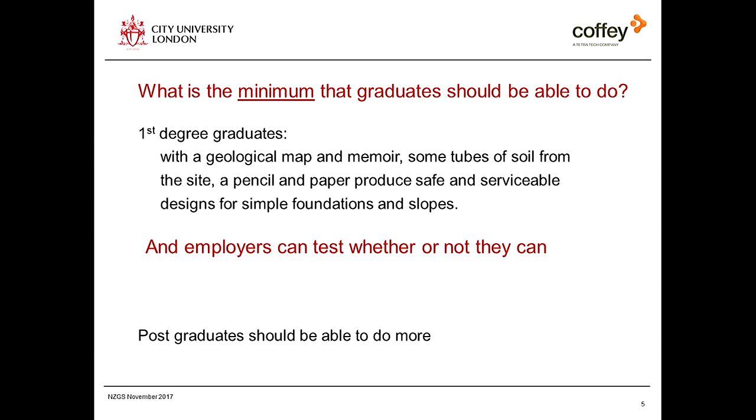Of course, postgraduates would be able to do much, much more than that. And you would hope graduates from a first degree course in civil engineering could do more than that. But if they can't do that, it seems to me there's no point in asking them to do anything else.

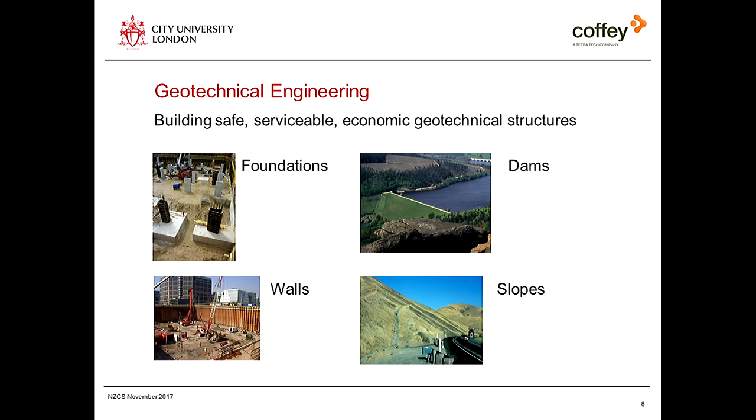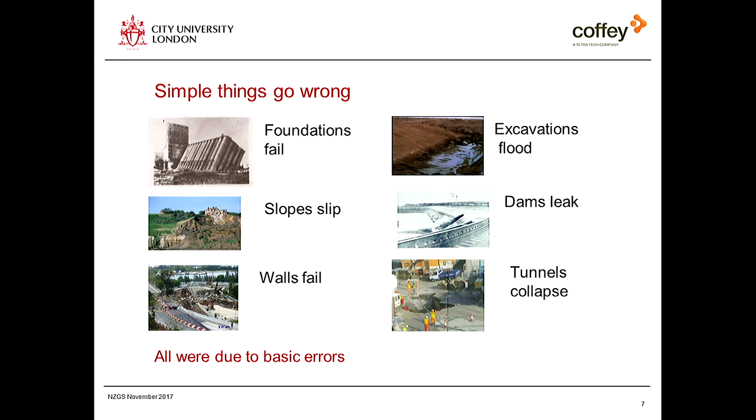Now, geotechnical engineering is about building safe, serviceable, economic geotechnical structures - foundations, dams, walls and slopes. And things go wrong. These are some of the classic failures in literature. You're probably familiar with some of these if you've studied the literature of things going wrong.

Now, I want to distinguish very clearly here between experience and expertise. You talk about an experienced engineer - what that means is they've been doing something for a long time, probably slightly incorrectly. Nothing's gone wrong and they've been lucky, and part of the reason is the margins of safety in geotechnical engineering are absolutely huge. You have to make a major cock-up before something goes wrong, and people make major cock-ups because they didn't get the fundamentals right. Now, expertise is about getting the fundamentals right, and that's what I'm interested in. Somebody with expertise will say, this is the first time I've done this, I'm doing it properly, it will be fine. So just remember the difference between experience and expertise.

And for you young ones, when the senior engineers quiz you over your designs, look them in the eye, because you're probably better engineers than they are.

Now, geotechnical engineering is not a standalone subject, despite what your university lecturers thought. They would ring-fence their subject - structural lecturers would ring-fence structures. There's very little intercommunication, but there's a lot of common ground between these disciplines, and I'll show this later on. Really, it is all physics with a little bit of chemistry. Everything in the way of engineering analysis boils down to physics.

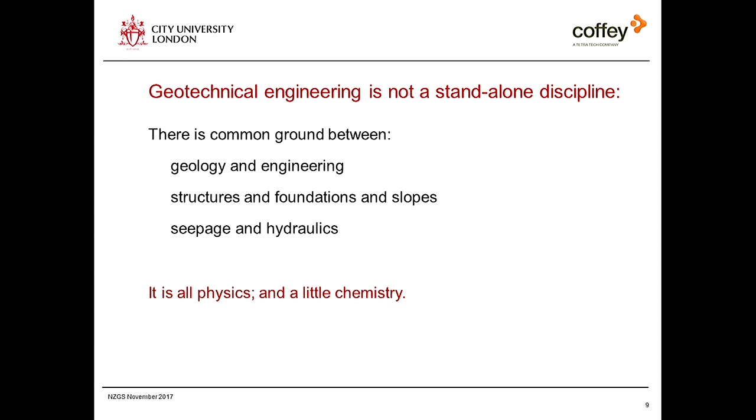Geology and geotechnical engineering are of course obviously related, and you might think about the overlap between those disciplines. Geology describes the past - it's a logos, a cataloguing subject. It describes the geo, it catalogues the geo, it says how did this material become like this. Engineering predicts the future - it says how much will this foundation settle if we load it. Now think about that, because the whole of geological teaching is to do with the study of the past and interpreting the past, and geologists have a certain mindset as a result of their education. Whereas engineers are all to do with calculations and forward looks and what happens if we do this and that, and that gives them a certain mindset.

And the trick is to see the overlap so the two work together.

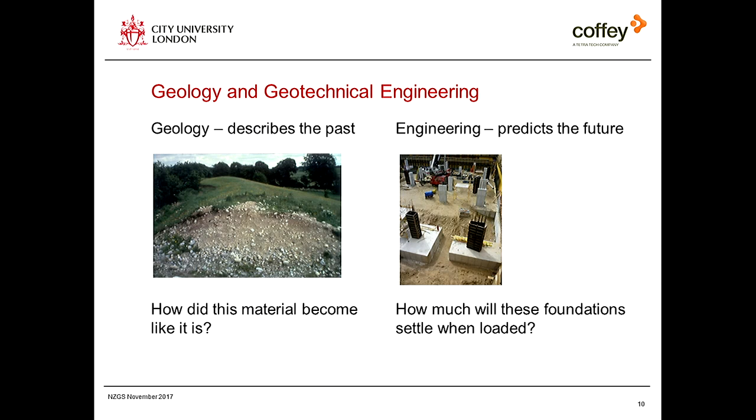There's another thing to think about - is the basis of geotechnical engineering empirical or is it theoretical? There are people who say that soil in the ground is so variable we cannot have a simple universal theory for soil mechanics, therefore we must test the hell out of everything and use empirical correlations. And there are others who say soil in the ground is really only a collection of mineral grains, rough or smooth, rounded or angular, arranged in a certain way - it is perfectly possible to have a simple universal theory that describes the behaviour of mineral grains. And it's not a question so much of what do you think about that, but what did your teachers think about that, because that's what you think about. I started my career at Imperial College as part of the first lot, and later on I was lucky enough to go to Cambridge and became part of the second lot.

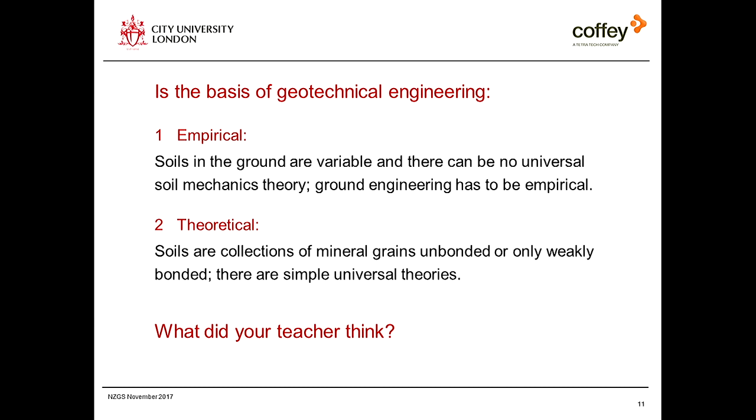I bridged the gap. Now, process.

How are skills manufactured? It's another way of talking about education. Think of education as a manufacturing process - so raw materials go into the factory, they are school leavers, they have basic maths, you can write an essay and you hope they can behave properly. And they go through this thing called a university that's a factory, it's turning raw material into a product, and the product is graduates in the construction industry. All that stuff about advancing knowledge and all that stuff - that's what happens, that's the realpolitik of education.

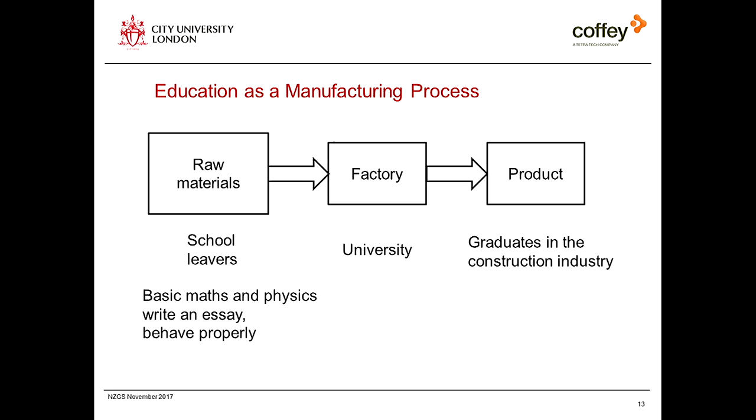Oh my goodness, that's fun, isn't it? I wonder what that was.

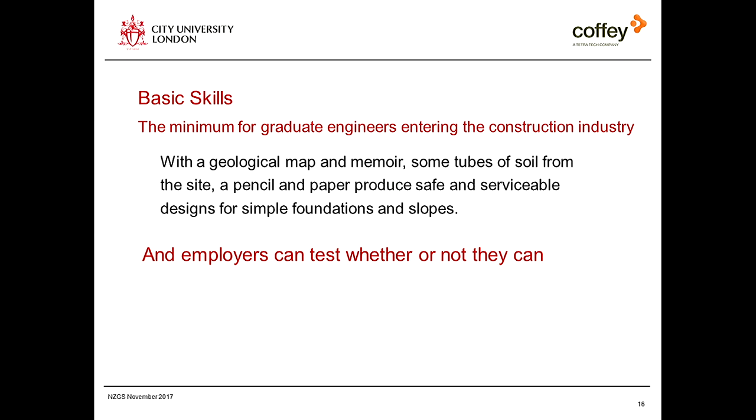They should be able to design a safe slope, and they should be able to design a serviceable foundation. In order to do that, they need to be able to determine appropriate parameters and do calculations with a pencil and a piece of paper.

No computers, because I come from a generation before electronics. I didn't even have a calculator. All I had were log tables and a slide rule. You know what a slide rule is, but the majority of those probably don't. But we know about that, don't we? Yeah, right. And I want people to be able to do these things, and engineers should do these things before they touch the first button.

I'm not going to talk about retaining walls here. Retaining walls are difficult, and I don't think it's appropriate to ask graduates, just people doing an undergraduate course, to really get to grips with the niceties of retaining wall design. You can get them to calculate earth pressures and all the rest of it, but there's no human known to man who can really get to the bottom of the stresses and displacements on a retaining wall. So it's not right to ask students to do it as well.

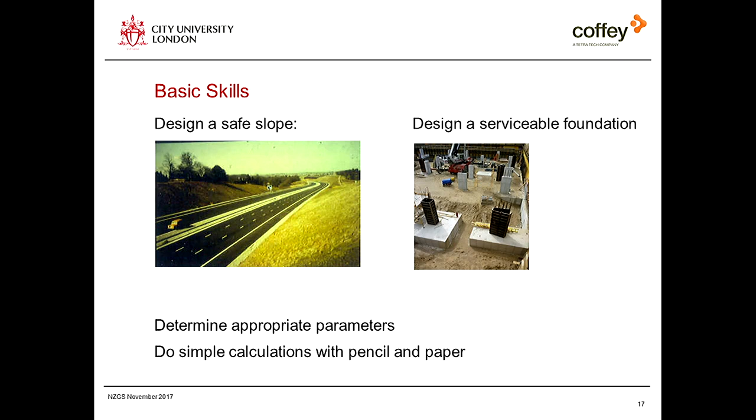There's a lot of common ground across an undergraduate course. Geotechnical analyses are very closely related to the basic analyses in structures and hydraulics. It is entirely wrong to ring-fence these subjects. There's so much overlap across them. They should really all be taught as common civil engineering.

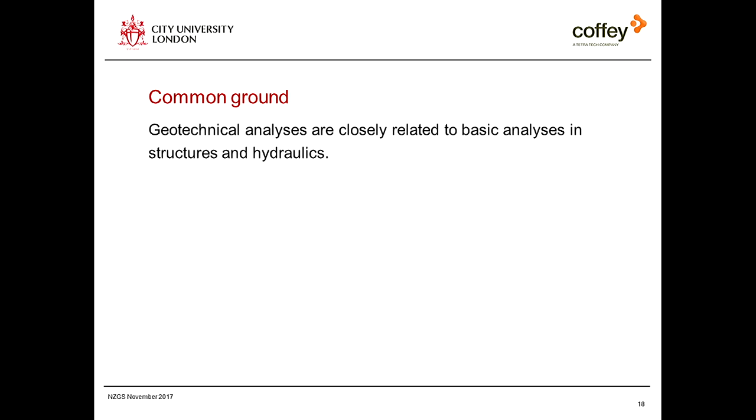For example, the calculation for the ultimate limit state of a beam is very, very similar, and the principle is identical, to the calculation for the ultimate limit state of a foundation. There's some work done on the left, and there's some work dissipated on the right. It's the same in both cases.

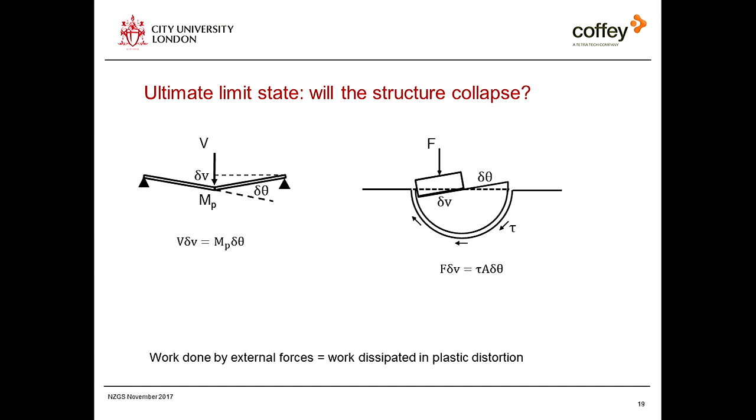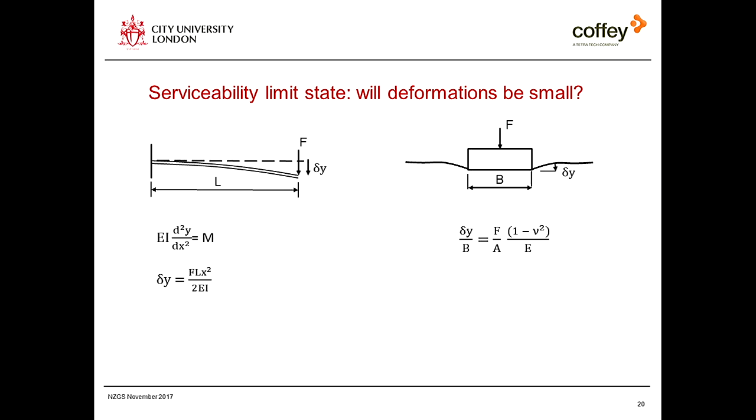The analyses for the deformation of a simple cantilever of a beam are very similar to the calculations for the settlement on a foundation on elastic soil. There's a displacement, there's E's coming in, there's A's coming in, and if you look across those equations you can see the principles are just the same. And the principles for thinking about open channel flow, Bernoulli, there's the Bernoulli equation, are very similar

to the analyses for flow of water through soils. If you look across, they're almost the same, except in seepage, the V squared term is neglected because the velocities are so small, and there's a head loss, P, and in the Bernoulli equation, energy is conserved. But they're very, very similar.

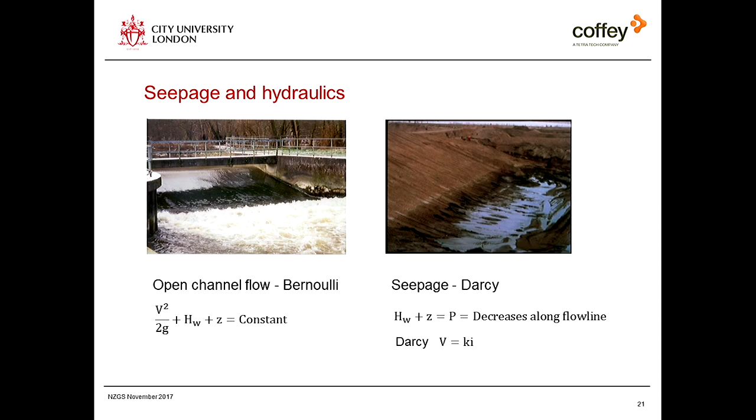And why should students come away from their course thinking that these are completely different subjects, completely different topics, with completely different analyses? Why shouldn't they be given the opportunity of seeing the overlap and developing their thoughts in that way? But the soils are different, and they're different in this way.

The soil behaviour depends on pore pressure, Terzaghi, so rates of loading and drainage matter. We'll see this in a minute. Strength and stiffness of soil vary with current stress and strain, and so change with loading. We know about friction. You may also know about the decay of stiffness with strain. These two little things are those that make soils a bit more interesting than steel. I mean, steel is just not interesting. Now, concrete is moderately interesting, but that's only cemented soil.

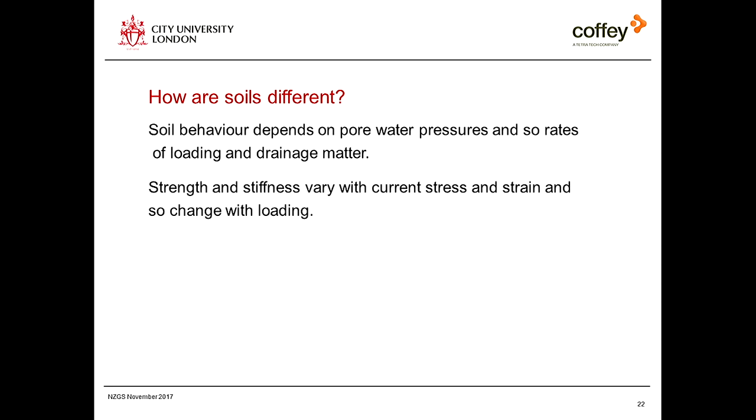And again, luckily, total and effective shear stresses are equal. When an engineer writes down an equation, it must contain all effective stresses, or all total stresses, or if there are total and effective stresses, they must be correctly related by the pore pressure. Just make sure that that happens when you write down an equation. I've seen many engineers mixing up total and effective stresses, and when challenged, they say, oh, it doesn't really matter, does it, John? I say, yes, it does. You must get that one right.

Now, when you open your standard textbook, Craig, anyone? You find page after page of analysis that justifies the principle of effective stress. Well, most of those analyses are actually wrong, and you shouldn't be worrying about them anyhow. This is one of the things that you've got to take on trust, and it's better not to question why. That works, and that's all you need to know. It works well.

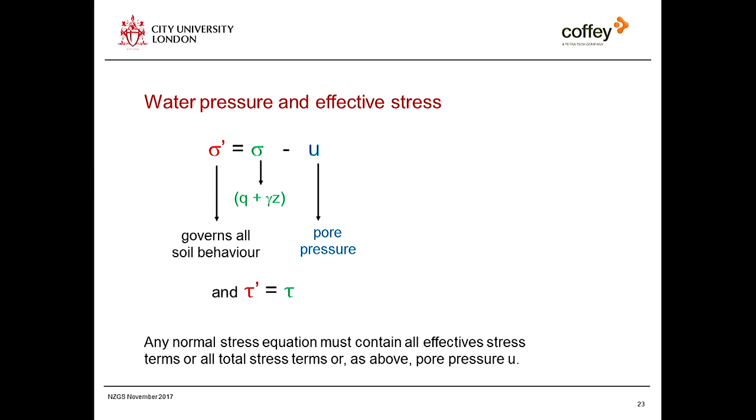Now, when soil is loaded, water has to squeeze out or not squeeze out. So we have two cases, and the question is, when soil is loaded, does the water move while the loading is being applied or not? So we have two limiting cases.

Here, the loading is drained because the pore pressure remains constant with time. As the total stress increases, the effective stress increases as well. If the pore pressure remains constant, you know it, so you can calculate effective stresses, and that is an effective stress analysis, sometimes called drained, sometimes called slow, which is a misnomer.

Welcome, you're not really terribly late, it's all right. The rest of you will be brought up to speed later on. I know the room is hard to find, but there you are. We're only up as far as consolidation, so it's okay.

Over here, the loading is applied so quickly that during the loading, the water has no time to move. In that case, the water pressures change, and the volume doesn't. That's called undrained loading, and because we don't know what the pore pressures are, the analysis has to be done with total stresses, and that is called a total stress analysis. They must not be mixed.

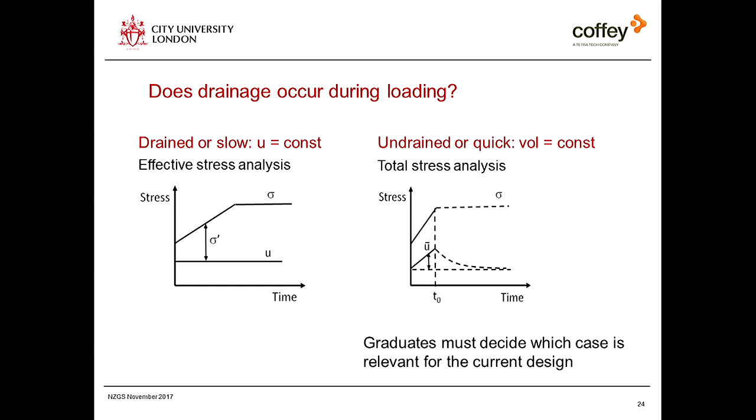Rates of loading and drainage vary enormously. Down the left-hand side there are rates of loading. An earthquake is of the order of 10 seconds, okay, we can argue whether it's 1 or 100, down to natural erosion, which over 30 years is 10 to the 9 seconds. So not many of you are more than 10 to the 9 seconds old. Some of us are well over 10 to the 9 seconds. But there's a huge difference there in the time it takes to apply loads.

Similarly, this is permeability. Now, if I said K is 10 to the minus something, that doesn't mean anything. So what I've done here is to show permeability in terms of how long it takes for water to flow 1 metre under a unit hydraulic gradient.

In gravel it's around 100 seconds, in clay it's around 10 to the 8 seconds. Again, this huge variation. For typical construction, 10 days to 3 years - you can dig a reasonable hole in 10 days, build a large building in 3 years. That's about it.

Sand and gravel, which are coarse, can be considered to be drained because the permeability is so large the water flows during the loading, and we can do effective stress analyses. For silts and clays, they are fine-grained soils, we have to consider them to be undrained, so we have to do a total stress analysis followed by consolidation.

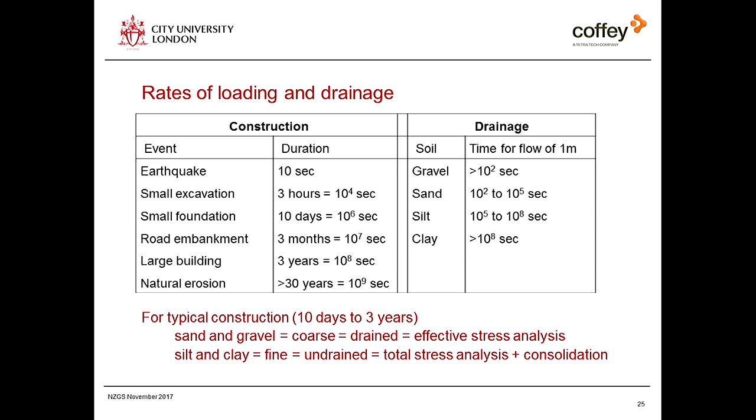Just notice we're talking about coarse-grained soils and fine-grained soils, drained loading and undrained loading - no mention here of cohesive soils and frictional soils. Soils are not either cohesive or frictional. Soils are either drained or undrained.

So engineering soils are simply a collection of mineral grains. They behave in exactly the same way, and what's controlling the behaviour is what's happening to the pore pressure. That's what the difference is in there - it's the pore pressures in these materials that are different. We'll explain why later on.

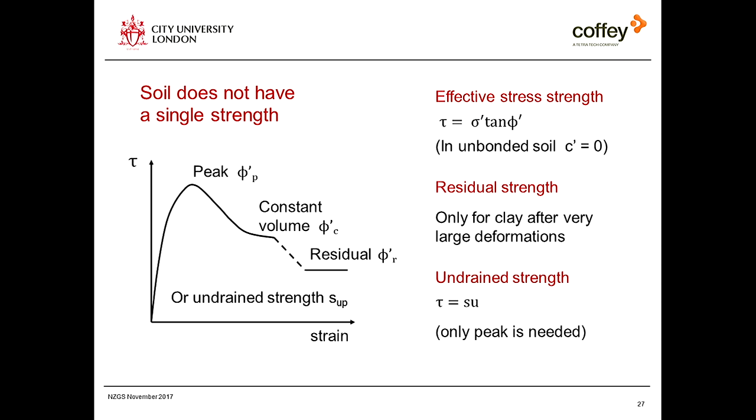So soil has at least 4 strengths. You can't talk about the strength of soil or the strength of a soil - it's got 4 strengths. And the engineer needs to decide which of those to measure and to use in an analysis. Graduate students should be able to do that because they know the fundamental principles of what's happening. Or we hope they do.

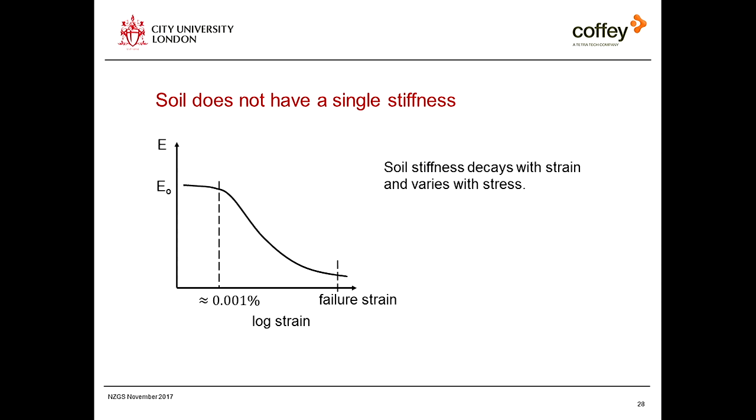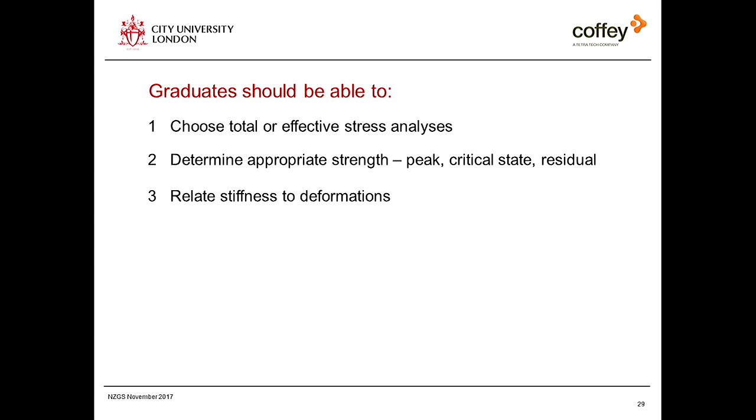Soil does not have a single stiffness, unlike steel, and we know that there is a rapid decay of stiffness with strain - from very small strains, very large stiffnesses, down to very small stiffnesses near failure. That's a very, very significant reduction in stiffness, and it matters. It's really such an important feature of soil mechanics that needs to be explained and taught, introduced at undergraduate level. So graduates should be able to choose a total or effective stress analysis, determine the appropriate strength, relate stiffness to deformations. They should be able to model the ground.

What are soils? They're simply mineral grains with water. That's what soils are. Engineering soils are that - gardener soils are a little bit different, but engineering soils are that. Rocks are like that, but they are strongly bonded and jointed.

One of the tests you must do with a piece of soil is determine whether it is bonded, whether it is cemented or not. To do that, you put your soil sample in a glass of water and come back in 24 hours, and almost certainly if it's a soil, it's just formed a cone, because soils are not bonded. If it's slightly bonded, it will be very weak, and you can examine that by poking pencils into it.

Rocks are strongly bonded and contain joints. That is the distinction between engineering soil and engineering rock: are the grains bonded or not, are there well-defined discontinuities and joints. Soils are grains that are not bonded, rocks are cemented soils that are jointed.

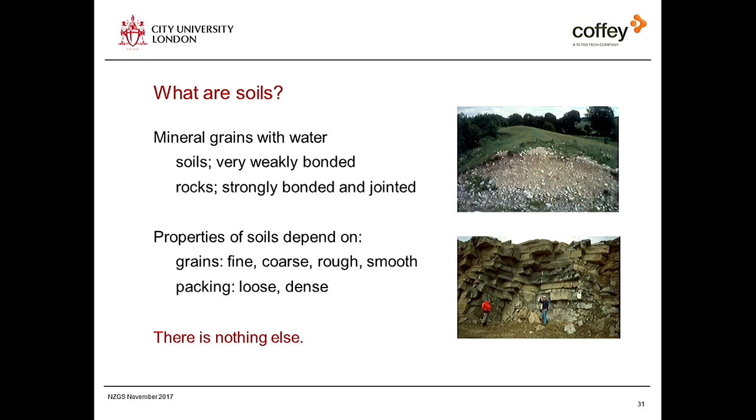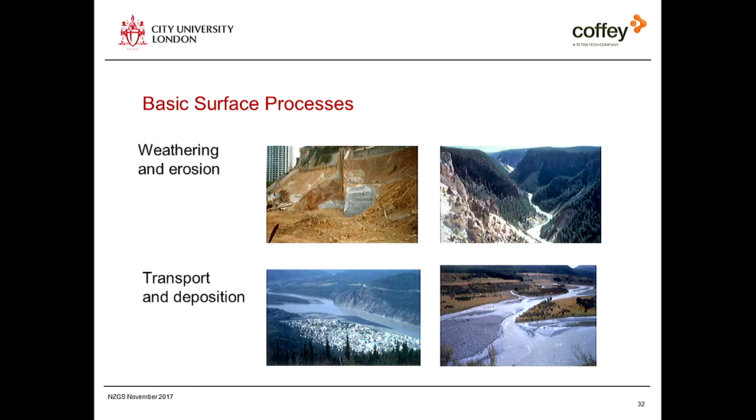There are a number of basic surface processes. There's weathering of granites in Hong Kong, erosion of a river valley in the Himalayas, transportation of materials in Canada, and deposition of the gravels somewhere I'm not sure.

Those are the fundamental mechanisms which create engineering soils. Climate determines the product of weathering. So when rocks weather into soils, what is produced depends not so much on the parent rock, but on the climate. In hot, wet climates, there's enough heat and wetness to change rocks chemically, and you finish up with quartz sands, which are inert, and clays of some kind.

In hot, dry environments, or in cold environments, there's not enough to get any chemistry going, but the changing temperatures every day simply expand and contract the rock. If you took a piece of rock and put it in the oven every morning and in the fridge every night for 10,000 years, you would finish up with sand. And that's how sands are made. They have the same characteristics as a parent rock, but the materials that are a product of chemical weathering are now quartz sands, which are essentially inert, and clays. Now that's, for you geology people, an extremely simple and simplistic view of the world, but it's enough for undergraduates to get a grip of what's happening.

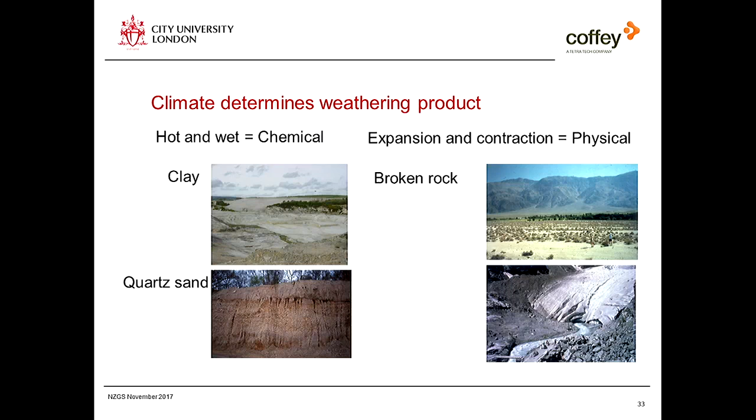When you're looking at a site and the soils, I want you to think about where it all came from. Where did the grains come from? How did they get to where they are? What has happened to them since they were deposited? And remember, because of plate tectonics and all this moving around stuff, everywhere has been somewhere else.

Now, England is quite interesting in this respect because it's on a bit of crustal plate that just moves steadily northwards throughout geological time without doing anything dramatic. There's been a few volcanic episodes, but it started off south of the equator, roughly where the southern African deserts are now. So our very early rocks, the Devonian, are sands. Then it moved up to the Congo, hot, steamy, and we go through the Carboniferous, our coal measures, and then we go to the Sahara, the Triassic, and then we go on through where the Mediterranean is now, the chalks.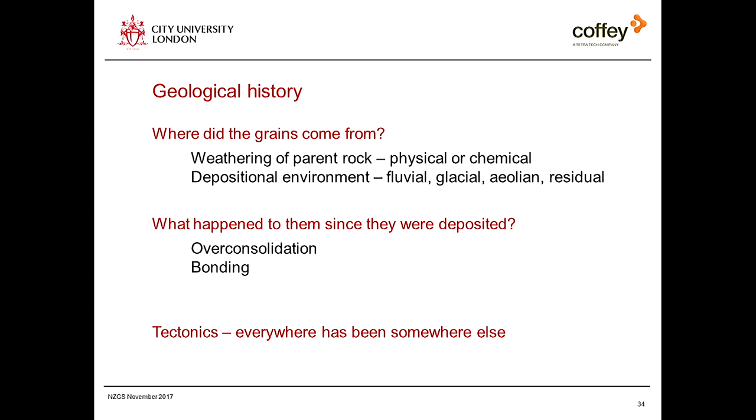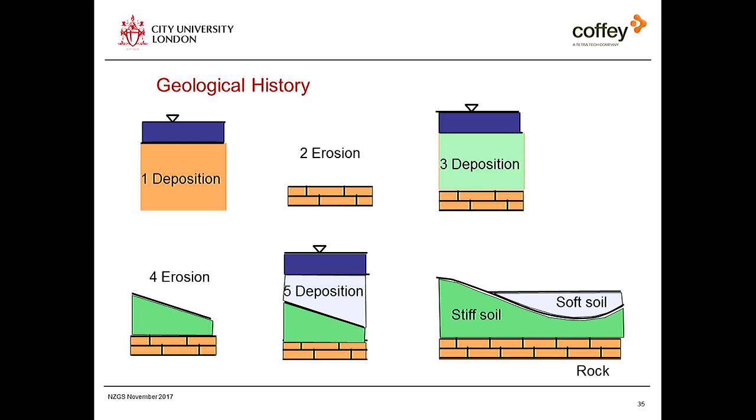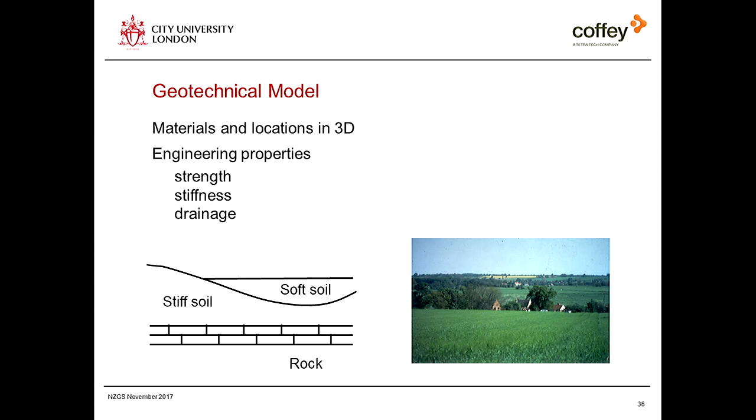This is a very simple geological history. You get some deposition, some erosion, some more deposition, some more erosion, some more deposition, and you finish up with a profile like that one. And that's fine. Without that pre-existing knowledge, all you see really is some rock, some stiff soil, some soft soil, and that doesn't give you the picture that you need. There's a photograph of a land surface for which the geology underneath is like that, and that's a great help in interpreting the geological maps and the borehole samples.

Engineers, graduate engineers, need to be able to evaluate design parameters - what friction angles should we take, and stuff like that. They should be able to, in order to start that process, give an objective description of soil. They've got to describe the grading, the shape, and the roughness of the particles. It helps if they can describe the mineralogy, and it helps if they can describe the plasticity, the Atterberg limits. And they should describe the state, loose or dense.

On Atterberg limits, it's interesting. You've got a liquid limit and a plastic limit. The liquid limit is the water content where it's all wet and slippery, and the plastic limit is the water content when it's all brittle and crumbly. You give an engineer a lump of soil and say, well, what's the plasticity of that, and they fiddle about with it, and say high plasticity that is, John, and low plasticity that's John. You can't do it like that, because what they're looking at is a lump of soil at a water content which may be anywhere between the liquid limit and the plastic limit. All they're looking at is the liquidity index.

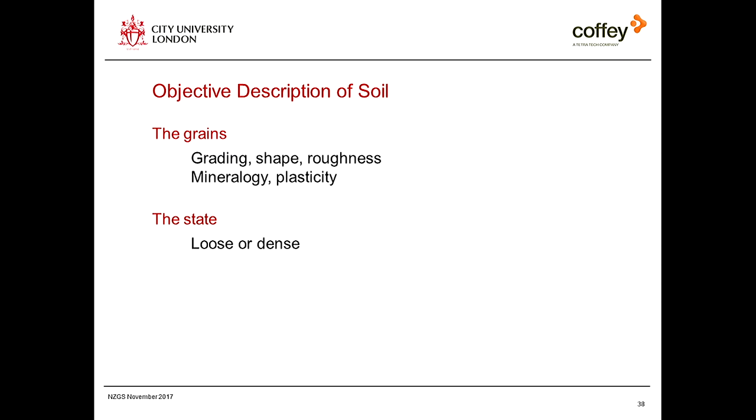You should be able to draw a grading curve by eye, just by looking at the soil. You can discover what the largest grain is quite easily. You can separate out into grains you can see from those you can't see, and that's roughly 0.06 of a millimetre. So you've got that point and that point, and just draw a line through it. The grading curve isn't going to be much different from that. But do it. Do it.

What is the grading of your soil? If you want to be clever, put it into a cylinder full of water, shake it all up, put it down, and the coarser grains will sediment first, then etc. You can't see it on that slide because the lights are up, but the soils here go from gravels, coarse gravels, medium gravels, coarse sand, fine sand, medium sand, silts. Anything left suspended after 24 hours or so is essentially clay, and anything left floating on top of the water is organic material.

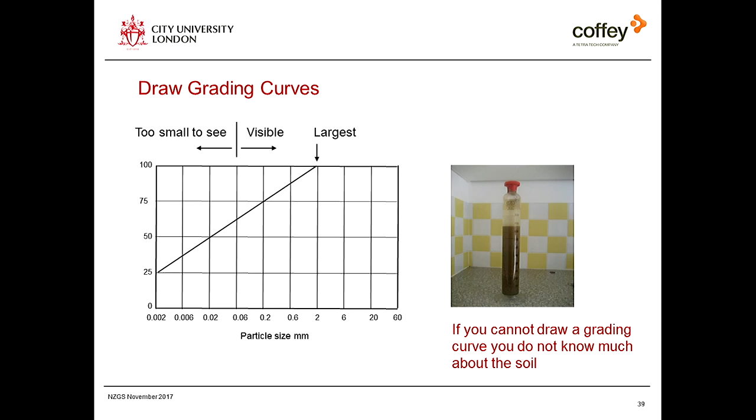Engineers, ground engineers, should have one of those and a glass of water on their desk. Not for drinking, but for sticking samples in. And you just do not see it, do you?

You should describe the grains - the ones you can see will be either smooth and rounded, or rough and angular. All this sub-rounded and all the rest of it, don't bother. It's either smooth and rounded because it's been worked in water, or rough and angular because it hasn't. For simple purposes, that's all you need to do. They don't teach you that at university, do they?

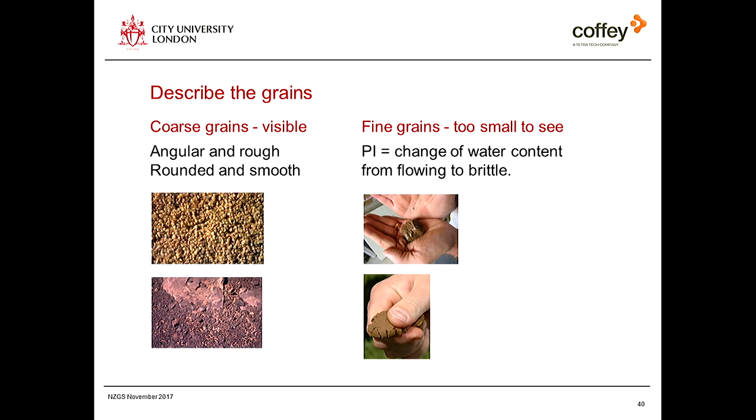Some parameters depend only on the grains. They are material parameters. The constant volume or critical friction angle is one of them. For soils which are fine-grained, you can't see the grains. If they're lower PI, we know about that, the friction angle will be in the high 20s. If it's high PI, we know what that means, it will be in the high teens, and anywhere between, it's roughly linear. London clay's in here somewhere, and the friction angle is 24 degrees.

You can do it, why not? You probably won't get a much better answer by chucking money at triaxial tests. For coarse grained soils, if it's smooth and rounded, it's 30 degrees and so on. It's just simple.

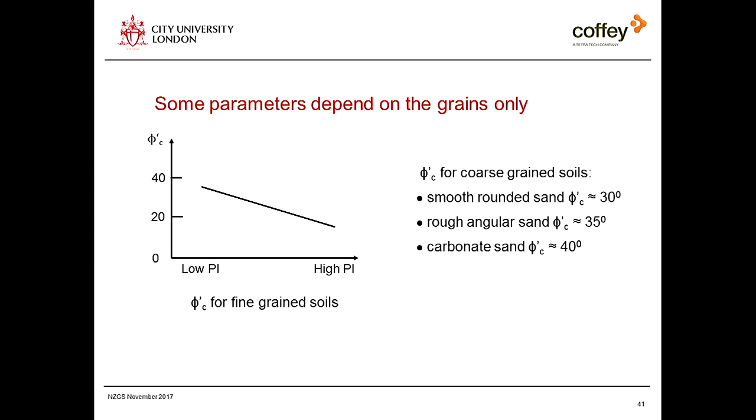Students graduating should be able to do these things. They should be able to estimate the current state between dense and loose.

When a fine-grained soil is at its minimum water content, it's at its plastic limit and it's crumbly. When it's at its maximum water content and still soil, it's soft and floppy. Those are liquid limits, and in between is the liquidity index. For coarse grained soil, the equivalent ones are the maximum and minimum density, and in between those are the relative density. Just notice the numbers go the other way. Ground engineering is perverse, isn't it?

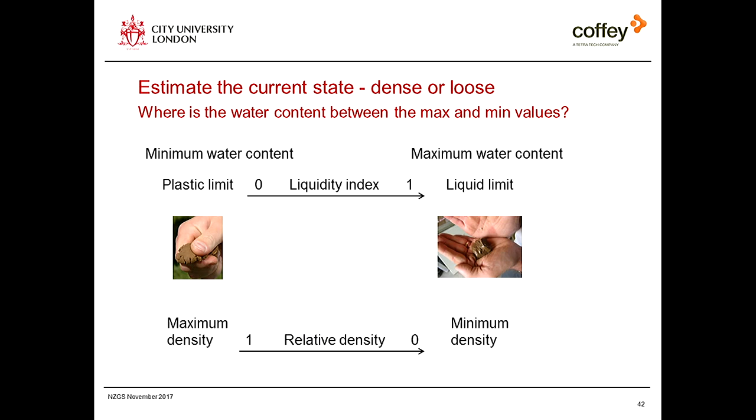That goes from 0 to 1, and that goes from 1 to 0. But a graduate engineer should be able to, from a sample of soil, make reasonable estimates of what its liquidity index is, where it is in those ranges. And there are simple parameters that depend on where it is.

The undrained strength of soil at its plastic limit is about 200 kilopascals. The undrained strength of soil at its liquid limit is around 2 kilopascals. There's a linear relationship between the Atterberg limits and the log of strength. So knowing the liquidity index, you can make reasonable estimates of undrained strength. And graduates should be able to do that.

There are simple relationships between angles of friction and relative density. And again, graduates should just be able to do these simple things.

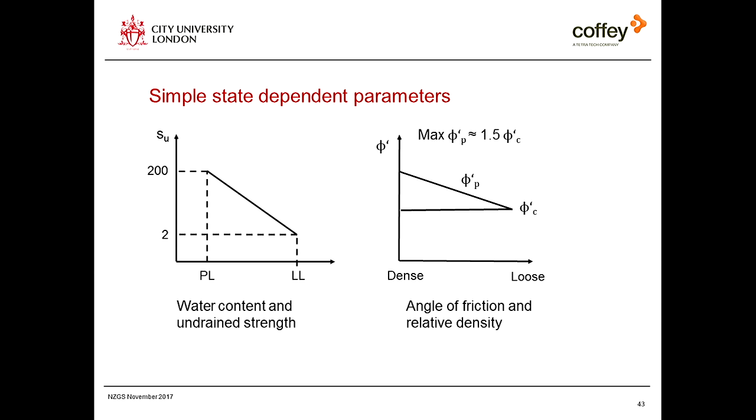You won't get significantly better answers by throwing money at laboratory testing. You might get slightly better answers, a degree or so here and there, but they won't be substantially different. So graduates should be able to describe a geological history, create a three-dimensional geotechnical model, and estimate design parameters from soil descriptions. They don't have to be able to do a triaxial test. In fact, there are very few of us who can do a reliable triaxial test.

Right, towards the end. They should be able to design simple slopes and foundations. Now, the basis of geotechnical design, any geotechnical design, is this.

You have to consider loading and drainage. If you believe the soil to be drained during your construction, you know what the pore pressures are, and you can do effective stress analyses. If you don't, it's total stress analyses. There are two distinctly different branches of calculation. One is to calculate an ultimate limit state, collapse, failure, and that is a plastic calculation. And there is another calculation which is to do with deformations at working load, and for simple geotechnical design, that is an elastic calculation. And then there are criteria for acceptance.

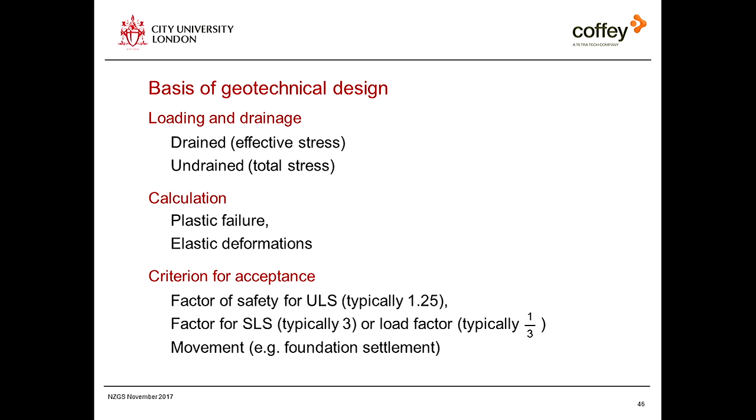And the answer is this. For the slope, we don't mind how much it moves, provided it doesn't fail. So the factor of safety is just that. It is a factor to ensure safety. For the foundation, though, we don't want it to move very much. And if it doesn't move very much, it won't move a lot. And we know, by chance, that if you calculate the ultimate load and divide by 3, you will be in a range of action where the movements are small. And that's the reason for that. So the factor there is nothing to do with safety, and we should stop calling it a factor of safety. It's a load factor, and it should be 1/3.

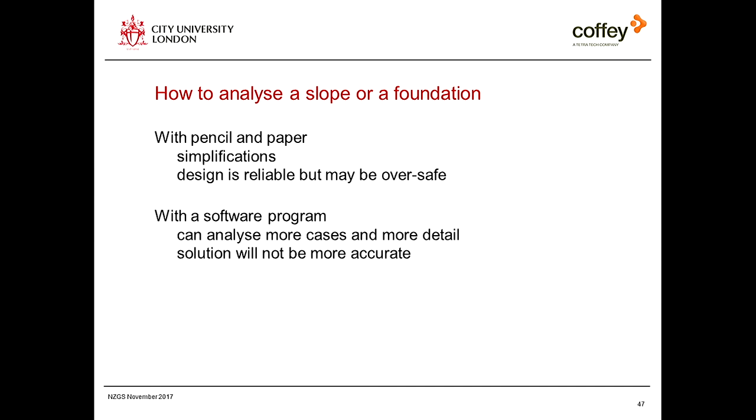All you need to know is that, critically, most slopes fail with slipping fairly shallow. In that case, it's an infinite slope case. If the slope is dry or totally submerged, the critical angle is the angle of friction. If there is steady state seepage, the critical angle is half the friction angle. And if you're really excited, you can go into the textbooks and find out why.

And the question now is, what strength should you put in here? Is it the peak strength, or the constant volume strength, or the residual strength? If you know there are old landslides there and old surfaces in clay, it's got to be the residual strength.

Otherwise, you can choose. Conventional practice puts in the peak strength with a factor of about 1.25. But a much more sensible way is to take the critical state strength, the constant volume strength, with the worst credible pore pressure and a factor of 1, just over 1, because it can't get worse than that.

By definition, you've chosen the worst credible pore pressure, so it can't get worse, and the critical friction angle is the lowest it can get, except if you get a residual. So my advice to engineers and students, graduates, is to make sure your slope stands up with the critical friction angle and the worst credible pore pressures, and the factor is a little bit more than 1.

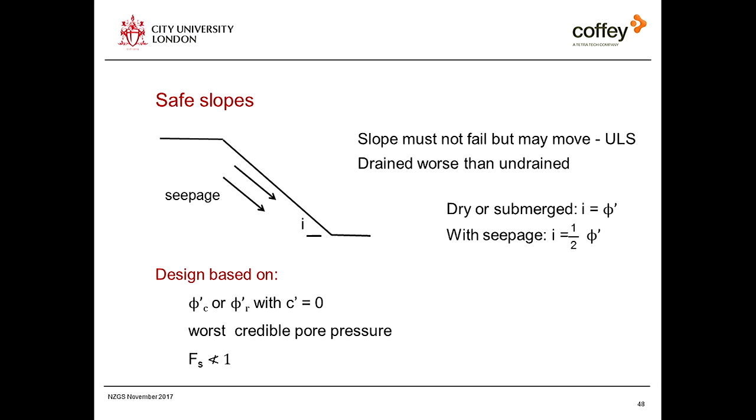So all you need to know is I equals phi, or I equals a half phi, and they are the constant volume, critical friction angles, which we've seen earlier on, are closely related to the grains. Sand, 30 degrees, and all the rest of it.

Easy peasy. People should be able to construct a reasonable flow net in which they can determine the pore pressures and rates of flow. And there is seepage coming out of this slope.

And here's the young engineer building his dam, and he's noticing water is seeping through the dam. In this case, he's got a critical hydraulic gradient. There's been erosion there at the toe, and the dam is breached, and there's death and destruction all down the valley, and there's the remedial works going on.

The point of that is children often know a good deal more practical soil mechanics than any number of qualified engineers.

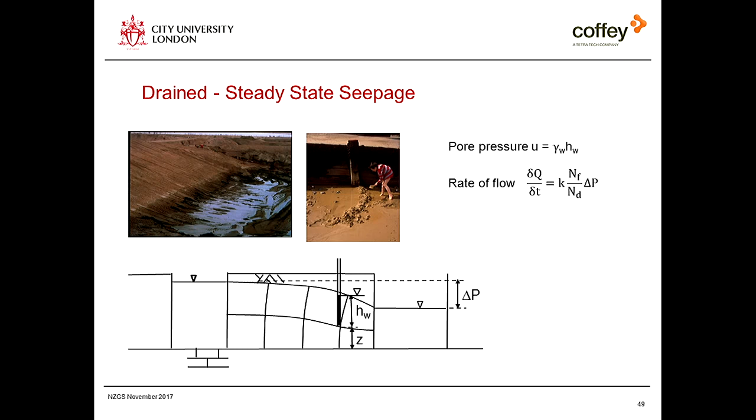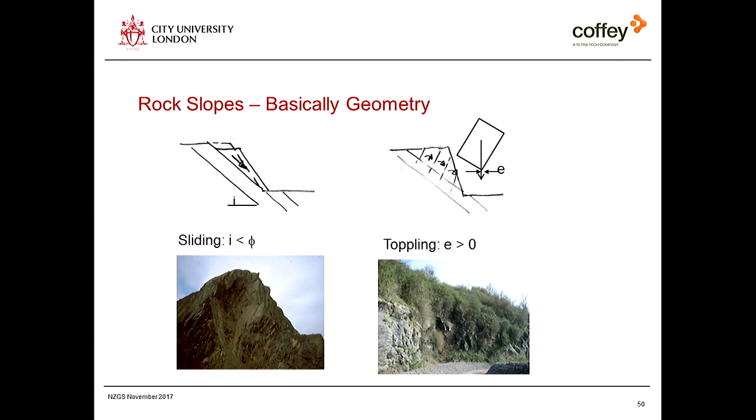Rock slopes is essentially geometry, and blocks can slide or blocks can topple, and we're just not interested in the strength of the rock material for practical purposes. If you're mining kilometres down below the ground, then of course the strength of rock matters. But for normal civil engineering purposes, the strength of fresh rock doesn't come into the equation. It's geometry, and people should know that.

A shallow foundation will require small movements. So this is a simple design based on the bearing capacity and the load factor.

So we're going to calculate the bearing capacity, and we're going to divide that by 3, load factor of 3, and that will bring us to a point in the load settlement curve where the strains are of the order of 0.1%, which is 10 millimetres for a foundation of 10 metres wide.

So that's the order. Now, just notice this, and the actual load settlement curve for a foundation does something like that. And if you keep on loading, it will go on and on and on. You can keep on loading a foundation deeper and deeper and deeper, and it just turns into a pile.

So what is the bearing capacity of a foundation? There is no such thing, you just keep on loading, providing it doesn't rock over. So the bearing capacity of a foundation is actually only the answer to a calculation.

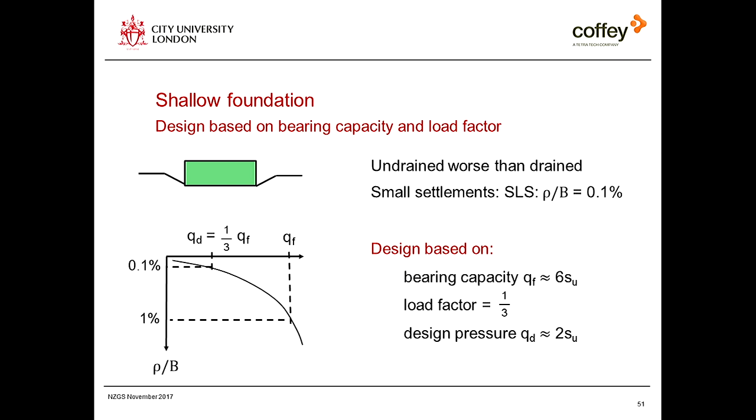That's what it is. And the calculation we do is a simple plastic one that gives us this bearing pressure at failure is 6 times the undrained strength, the load factor of a third, the design pressure is 2 SU. And really, that's all you need to know at this level. You design foundations on clays, 2 SU.

We talked about consolidation, and what people are interested in is the magnitude of the final settlement, and that's related to this compressibility parameter that I haven't gone into now. And it'll certainly be told to engineers, probably.

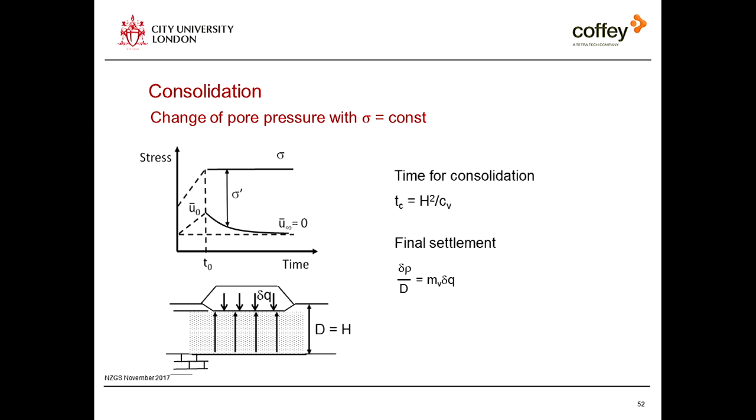And what's equally interesting is how long it takes for consolidation to occur. And the time of consolidation is simply h squared over cv. And again, those two little equations are really all you need to know about to design the settlement, the time-dependent settlement of simple foundations.

That then is John's basic undergraduate syllabus, which you could probably teach in the first term, including practicals. If you give them that, they're well on the way to becoming good, proper ground engineers who don't make mistakes. I'm going to show you some examples of people making mistakes, so you won't make these same mistakes. It's all right-ish to make a mistake once, but it's not all right to make the same mistake twice, or to make a mistake you've seen someone else make. So now it's not all right for you to make these mistakes.

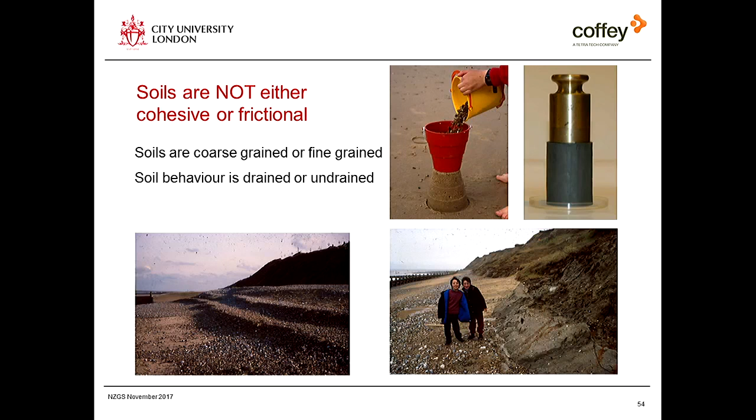Soils are not either cohesive or frictional. The mistake is to describe soil as cohesive or frictional soil - sand can be cohesive, with an unconfined compressive strength, and clay can be frictional. Please don't talk about cohesive and frictional soils. Instead talk about soils that are coarse-grained or fine-grained, because that controls the drainage and whether you'll be doing total stress or effective stress analyses, whether you need an undrained shear strength or a friction angle. Cohesion C-dashed and undrained strength SU are not the same thing.

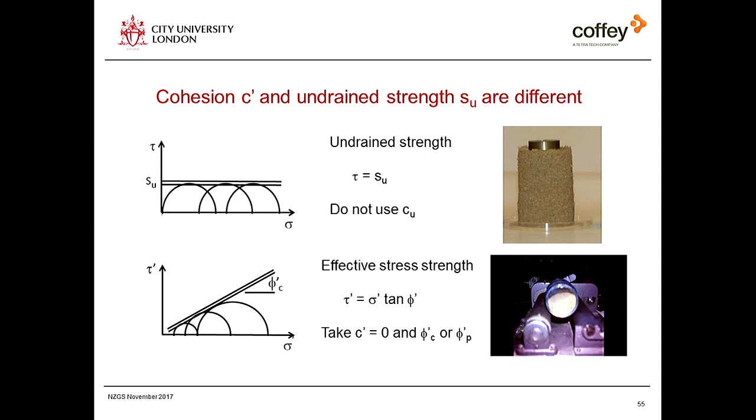This is the unconfined compression test, which you can amaze your mum with. You do the test, put the bucket on there, load it until the sample fails. You can now draw the Mohr's circle of total stress, because the radial stress is 0, and you can calculate the axial stress from the height of gravel in the bucket. So you can now draw the Mohr circle of total stress.

Below is the Mohr circle of effective stress. You can dry the sand out, pour it into a heap, and get the friction angle. The Mohr circle of effective stress must have the same diameter as the Mohr circle of total stress, and it must just touch the envelope. The horizontal difference between those two circles is the pore pressure. We have just determined the suction, the negative pore pressure in a sandcastle, and it's the suctions that give the sand the effective stress coupled with the friction angle it needs to stand up.

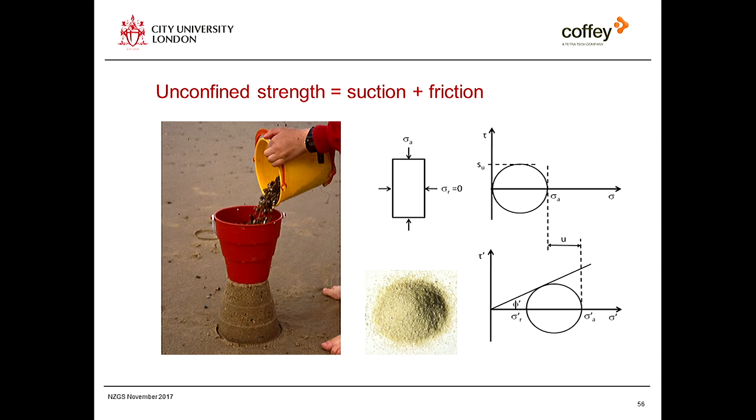And you can do the whole thing at the seaside and draw the graphs in sand with your finger - I've done it many times.

In order to determine whether the soil has cohesion, you put it into a glass of water and wait. If it disperses, it's clearly cohesionless. If it forms a lump, you poke it with a pencil, and it will almost certainly, if it's a soil, be very soft and weak. You must wait at least 24 hours for this to happen. If it's still strong, then it's no longer a soil, it's a soft rock, and we're doing something other than soil mechanics calculations, because soil mechanics deals with an uncemented or only weakly cemented collection of granular material.

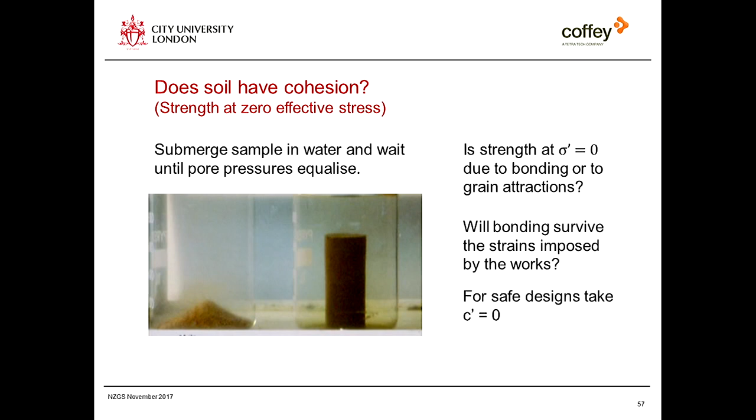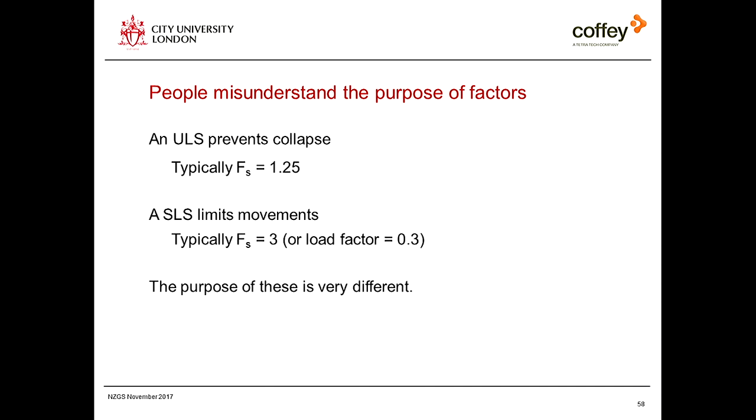People misunderstand the purpose of factors, and I went through that earlier on - the purpose of factors is very different. So these are the common, simple, conceptual mistakes that I find ground engineers doing too frequently, and we need to get the young people to educate the senior people. So that was it, that's where we've been, and thank you very much for listening so patiently, thanks very much.